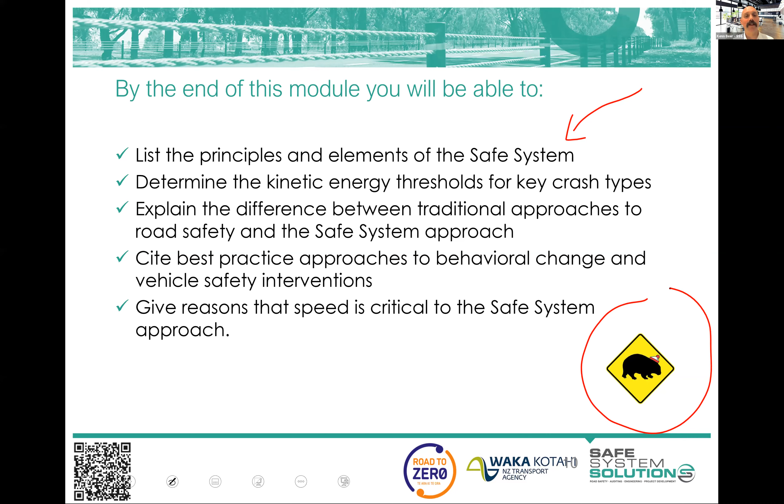Okay, Road to Zero is New Zealand's road safety strategy 2020 to 2030. Now, I know you all have a copy of this next to your bed and you read it every night. But for those who don't, it's worth picking up and having a flick through, because it's actually a really world-class document for a number of reasons. The approach being taken, the research, evidence, and modelling behind it, and a few of the interventions are quite world-leading. You've got some wonderful road safety experts in New Zealand who are helping shape these things. And then there's a real acknowledgement of the operational challenges that take place at every level - from the national level, the engineers out there on the arterial network trying to upgrade highways and the like, local government to the local roads and the challenges associated with that, the community challenges that are faced. So, really, really good document.

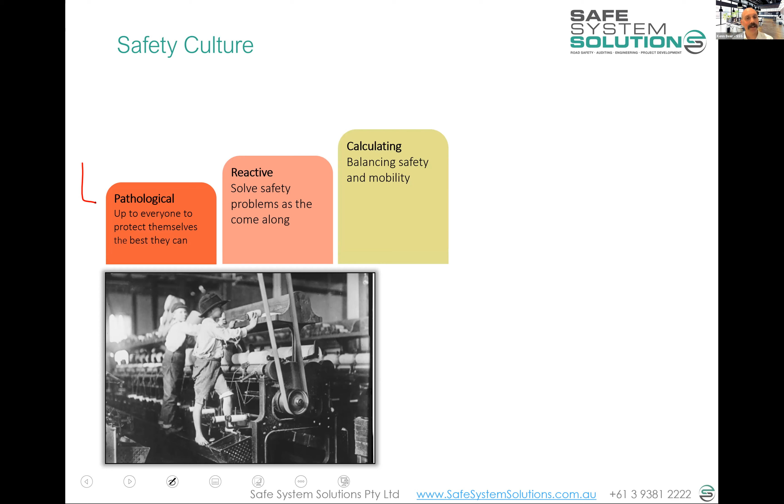Then you elevate up from that, and it goes into what we call the calculating safety culture. This is where the economists usually come into play. They come into the factory and analyze it, and okay, you've got an issue there, and you're paying out quite a bit of money for lost widget production and productivity, you've got to pay the families out for people that have been killed, and you get fined for these different things. So actually, if you were to invest £30,000 in this factory, you could save yourself £90,000 over the next 5 years. I've come up with this thing called a benefit cost ratio - notice I was doing it in pounds because this was back in the day when pounds were used - a benefit cost ratio of 3. So every pound you invest, you'll get £3 in return - it's good, it's good investment to invest in safety. And the factory owner says, yeah, okay, that sounds good, and then you go and fix it.

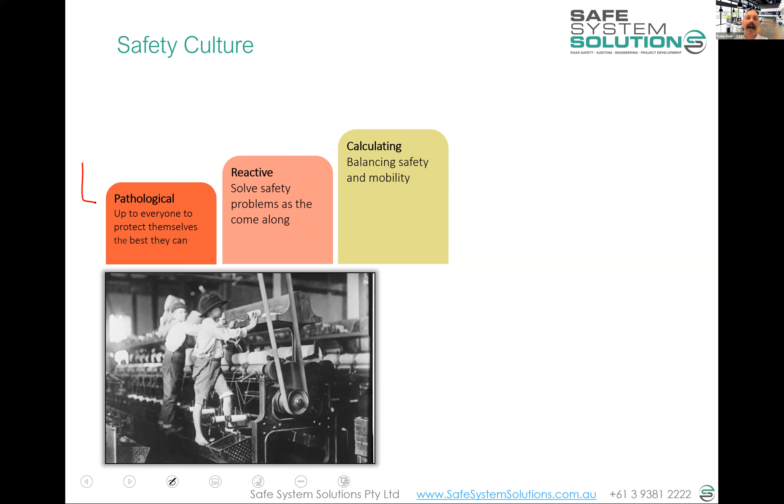Then you elevate it up one notch from that. This is where we're into what we call a proactive safety culture, which says safety must be at this very, very high level. We will produce as many widgets as we possibly can up to that safety level. And if we drop under that safety level, widget production will stop until we get back to that safety level.

This is where really factories have generally gone in the developed world. We are in a proactive safety culture, and nobody will bat an eyelid if a factory gets shut down for safety issues. Obviously the people running the factory will quickly rectify any risks that have been identified, but it'll stop. Nobody's saying, oh, this is an impingement on my freedom and blah blah blah, all that usual stuff we hear when we try to implement risk reduction measures on the road network.

Now, it's a different system. I mean, people will say this is a closed system and very regulated and the like, but there was a day when it was a very open system. The last thing you have in the safety culture ladder is the idea that we need to continually invest once we have a proactive safety culture to maintain that culture. It doesn't just happen and then you walk away and do nothing - there's a lot of effort in continuing to maintain that.

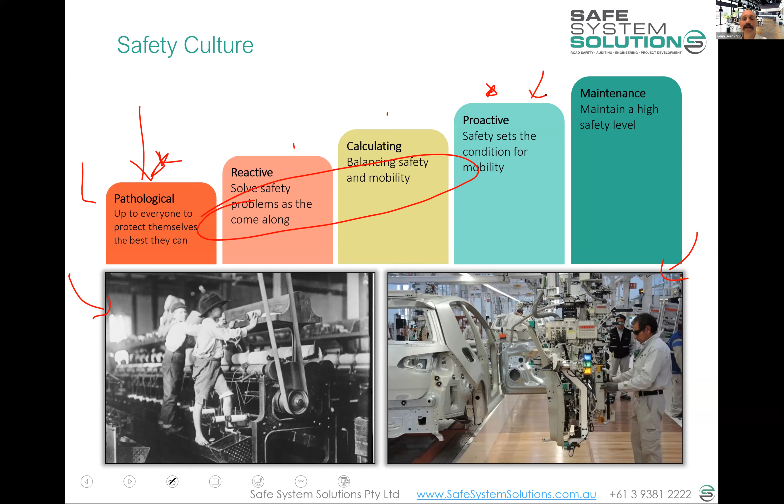So any comments or questions on that, Kathy?

No, Ken, all good. We've got some widget responses that have come in though. Anyway, there's one I'll read out: widget, wombats in danger, getting experience transformation. I love it - prize there, by the way. Yes, but there is a question from earlier.

You mentioned that everything was based on evidence - who is collecting, curating, evaluating, and distributing the evidence? Wow, amazing question. So there's quite a number of agencies around the world dedicated to researching and evaluating road safety. The national or state agencies in Australia do a fair bit of that. Austroads is a great platform for trying to disseminate some of the research and direct research. Austroads takes ownership of that - Austroads is really just a collection of state and New Zealand national road agencies, so that they can invest collectively in research and production of guides and the like, and try to disseminate that.

Waka Kotahi does a lot of that as well. We see pockets of local government coming up with things, because it doesn't need to be these big, million-dollar research projects. You can try something in your local area and get it evaluated in a quick, cost-effective manner.

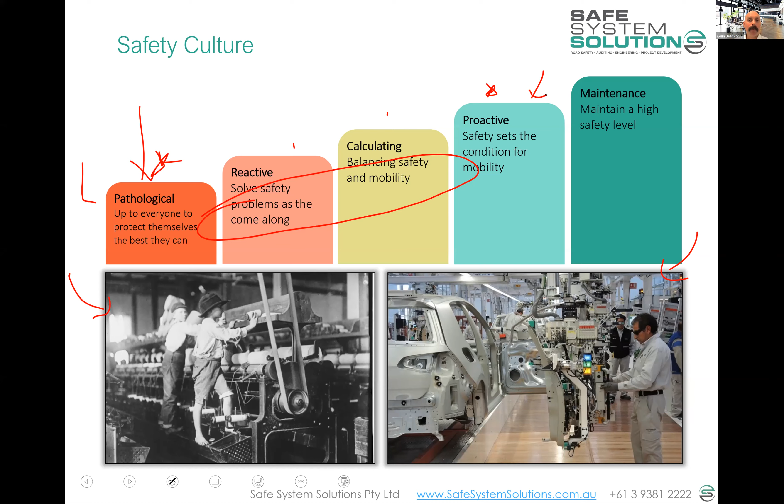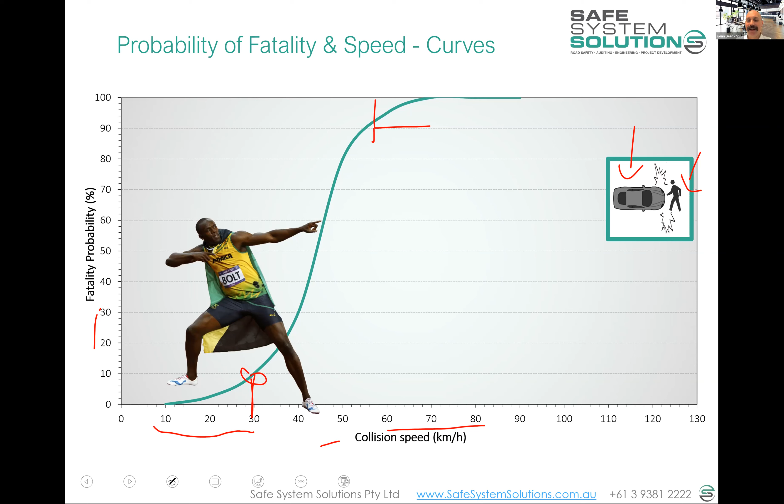Now, we can have a bit of a laugh at that one, but we know that those are within tolerable force thresholds of humans. In fact, he recovers, he broke a few ribs, but came back later the next year and won the gold medal in the Olympics. So that's what we can handle.

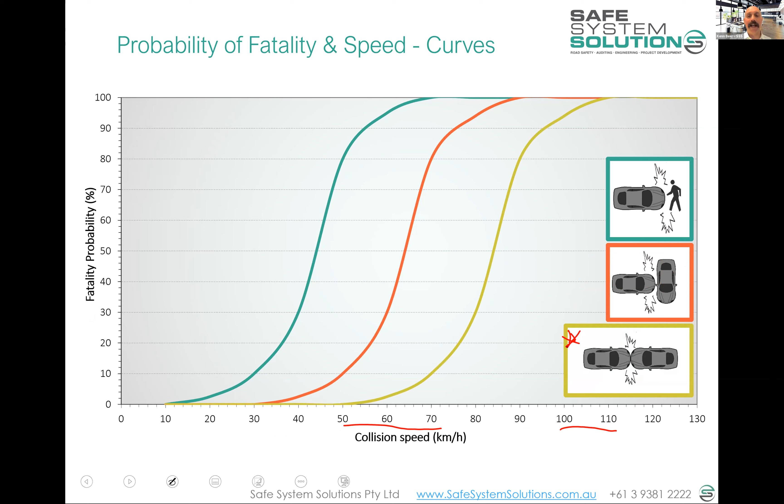At a closing speed of, say, 100 kilometers per hour each, the closing speed is 200 kilometers an hour. But the crash forces imparted onto the occupants of those vehicles is actually equivalent to a 100 kilometer per hour crash. Some of you will be going, not sure, my physics is questioning that.

There's a great Mythbusters episode on this. Kathy, if we can send a link to that Mythbusters episode, I'd really like to share that with people so we can move that whole conversation on. But basically, it's because if you have the same mass vehicles at the same speed crashing head on, the occupants of the vehicles go from 100 to 0, and it's the deceleration forces that do the damage. So it is equivalent to running into a wall at 100 kilometers per hour. Let's send around that episode.

Now, interestingly, in safe system terms, we draw this line: 30 for pedestrians, 50 for right angle crashes, 70 for head-on crashes. These become really important numbers for us as we assess anything out there for its alignment with safe system principles, because we're saying, okay, humans are going to make mistakes, these crashes are going to happen. Are they going to happen within these tolerable limits?

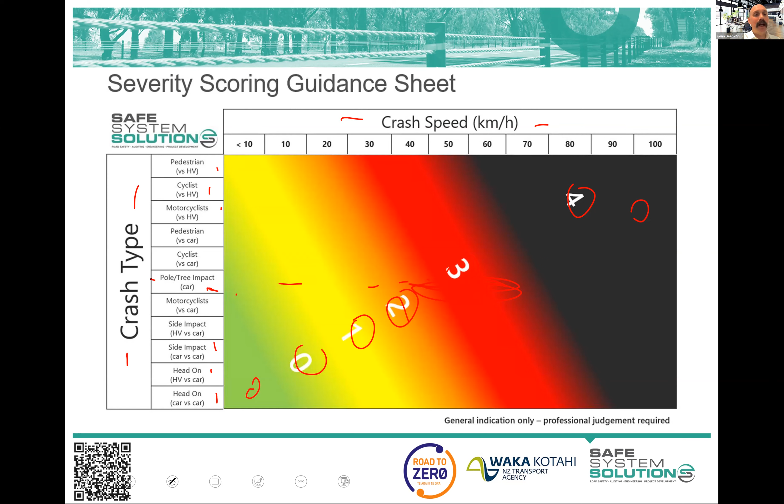So you'd probably be slightly moving it down a little bit on this. And so you would make some sort of judgment calls, and you'd be talking around maybe the 60, 70 kilometre per hour mark as sort of potentially survivable, maybe for somewhere in that area.

Power poles, if you wanted to design something to kill and seriously injure people on the road, power poles are pretty good design from that perspective. Obviously a pretty horrific design. I mean, the only thing would be to sharpen it, I suppose, just to really hammer it home.

But anyway, you're getting very graphic there, Ken. Thank you for that image this time of the morning.

There were some other questions based on what do the curves look like when hit with heavy vehicles, and are these based on fatalities across all age groups? Is this where the scoring sheet comes into it a bit more? Yeah, and it is across all age groups, those curves were. Now I really do need to flag that those curves are generally accepted nationally in New Zealand, at Austroads level, everybody uses them. There's a lot of research currently going on into recreating those, looking in more detail in the Australian and New Zealand environment with slightly newer fleets, but also reanalyzing those, and they're shifting a little bit. But for now, just take them because everybody uses them, and we'll keep an eye on the research.

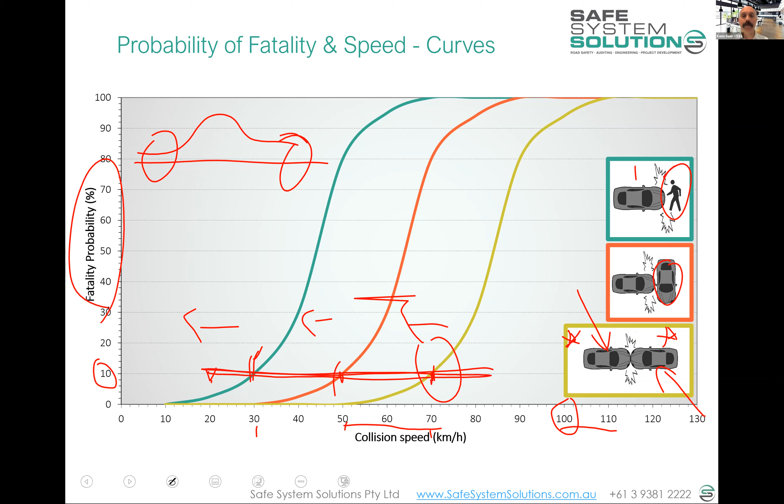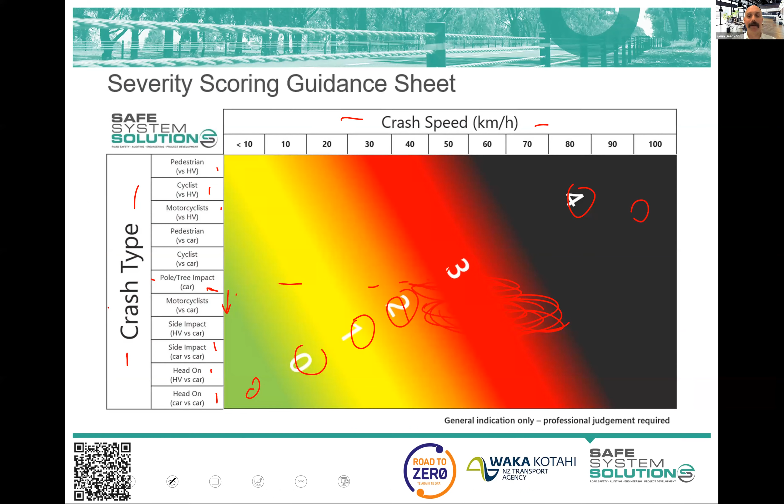And the thing is, though, that changing the human is the hardest thing to do in the system, because we're fighting against biology and DNA, and it's going to be extremely hard. I'm not saying it's impossible for us to get better human operation in the system. But where we go to is to say this is a system failure, and we need to alter the system when these mistakes happen to mean that it doesn't result in death and serious injury. And that could be the vehicle, it could be the road and roadside, it could be the road user. So let's look for system changes.

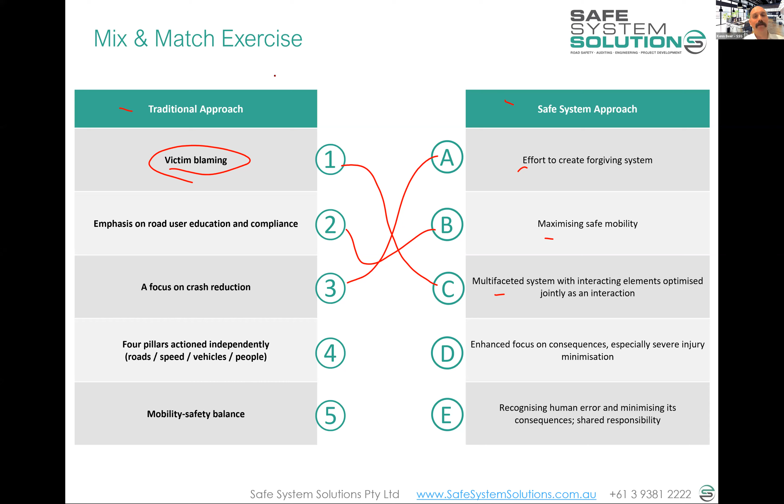Now let's pop the last guesses in. I should have said a few of these could probably go to a number of different cells. I took it from an Austroads thing from a while back, but it's a good little exercise to get that thinking happening. Hit submit for those who haven't—let's display that, Kathy. Almost everybody's done it.

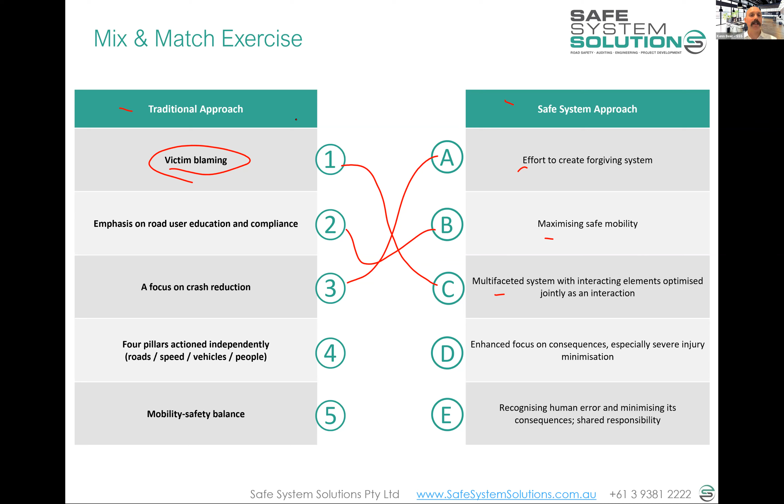Okay, let's have a quick look here. Good stuff. Actually, instead of just looking at where people went, I'm going to stop sharing that and do it on the screen here because it's a little easier to see than the multi-choice. But as I say, some could have gone to a few different ones.

Victim blaming—well, we're trying to recognize human error and minimize its consequence. We've got shared responsibility under the safe system. Emphasis on road user education and compliance connects to the effort to create a forgiving system—it's not to say we ignore education and compliance, it's just that effort to create that forgiving system. A focus on crash reduction connects to enhanced focus on consequence, especially severe injury minimization, with crash reduction meaning all crashes of all types.

Four pillars acting independently connects to a multifaceted system with interacting elements optimized jointly as an interaction—that's a bit of a mouthful. Mobility safety balance connects to maximizing safe mobility, which is a better way to say that. I hope that helped a little in your thinking—don't worry if you put some to slightly different ones, because the thinking itself is the key.

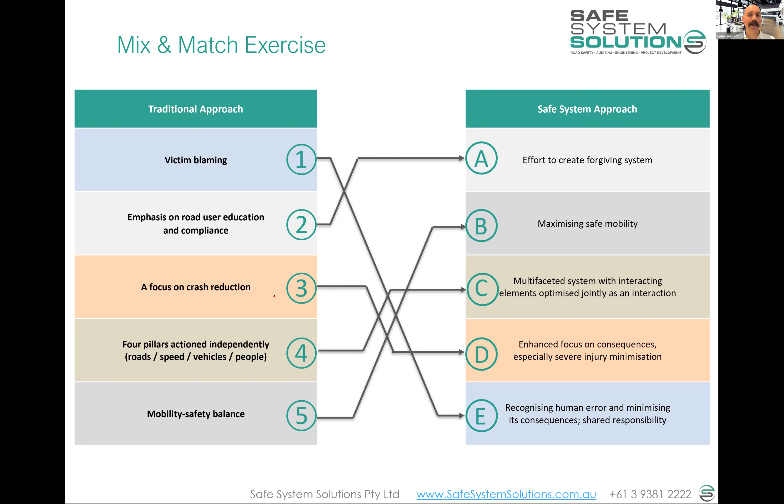A good quote here from Ian Cameron, a Western Australian: 'We need a paradigm shift in road safety policy to stop the road death epidemic, and we need it now. It is unrealistic to expect that education and enforcement alone will bring the needed step change. Even road users who know and follow the rules make mistakes. A safe system creates an environment in which simple mistakes will no longer kill or seriously injure people.'

All right, quick little exercise here. Here is a bit of road. It's got a central wire rope safety barrier system and a flush narrow median. It's got 2 lanes in one direction, 1 lane in the other, and it swaps.

So it's what we call a 2+1 road. You know next to nothing about this road. There's a bit more of it, you can see. But this project was amazingly hard to actually make happen for a big number of reasons. It was one of the first 2+1 central barrier jobs in Victoria, in my home state, and there was an unbelievable amount of pushback across a whole lot of areas.

Let's quickly, I'll give you a second to write in some of the things that stopped this project for a long time from actually being implemented. We said, this is what we want to do, this is sort of the design, and then what were the pushbacks? So just write them in the chat. Things you think put some serious brakes on this project.

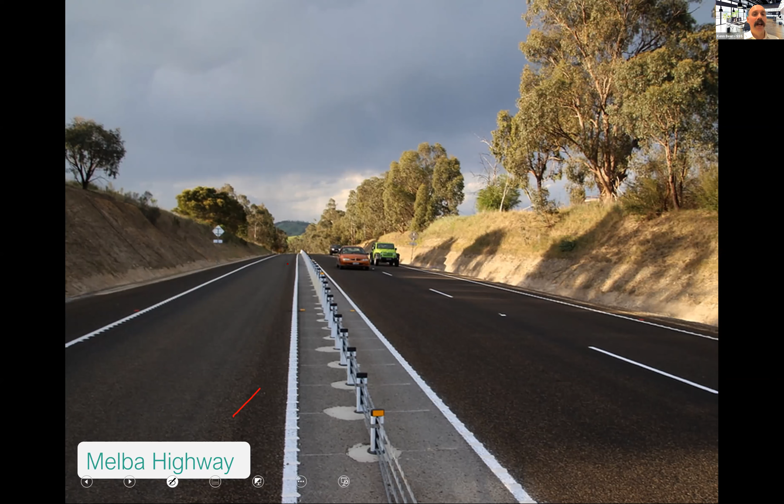That is not to say these were the biggest issues. There were a couple that, especially this deflection one, just blew my mind. What I was saying is that if a vehicle was to leave their lane and hit that barrier, you calculate the deflection, and it's going to go slightly into the oncoming lane.

This basically stopped the project for about a year, because they said, well, you're going to deflect into the oncoming lane. And we're going, well, hang on a second. It's currently got a painted white line as the only thing separating the lanes, and you're worried about it deflecting a little bit into the oncoming lane? It doesn't meet the standards.

Bloody hell, okay, let's stand back and have a look at this from a logical, real world perspective. We're going to save huge amounts of lives. So, yeah, the point of this is that we're going to come up with all sorts of challenges and hurdles. And to be able to stand back and look at what is going to get us the best reduction in trauma for our community is what we need to do. And it may not be the same way that we've been operating.

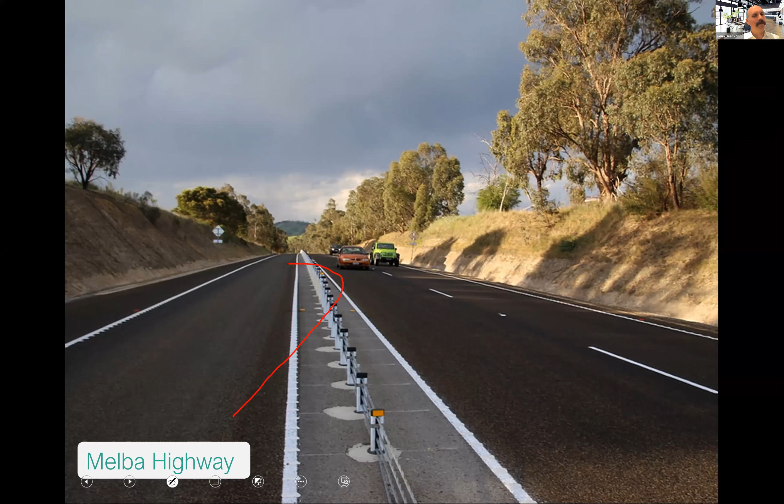We're going to need to innovate. We're going to need to change what we've been doing. We're going to need to implement things that cater for people doing things wrong, like people falling asleep and leaving their lane, or people texting and leaving their lane. We're going to try and stop this resulting in death or serious injury. We're going to try and minimize that, of course, but it's still going to happen.

This one, of course, once it finally got in, somebody hit it. Lots of people are hitting it. Some of them would have probably hit oncoming vehicles. In fact, one of them in particular very much was going to hit an oncoming vehicle.

The people involved called up the road authority office and said, hey, I just want to talk to the person who put that barrier system in. You know, if you get that call, as many of you have, you think, oh God, here they're going to shout at me about something. Well, this one just wanted to thank the team, and it wasn't me who got that call, but they managed to say, hey, do you want to talk to our comms team? And then they videoed it.

We put that little two-minute video into your pack. Some of you would have seen it before, but I really encourage you to watch that. It's a great little video, and it's this road. It's this, not this exact incident, that was another just probably nuisance hit, but it's a really good demonstration of safe system in action.

Safe system in action because somebody made a mistake. Somebody fell asleep, they left their lane, they hit the barrier instead of the vehicle that they would have hit. And to me, that's the system just stepping in. It's still a crash, but it doesn't result in death or serious injury.

If the barrier wasn't there, we'd probably be saying, why would you drive when you were that tired? Yeah, and say, you can't do that. Let's do another education campaign on not fatigue driving. But this is a system response.

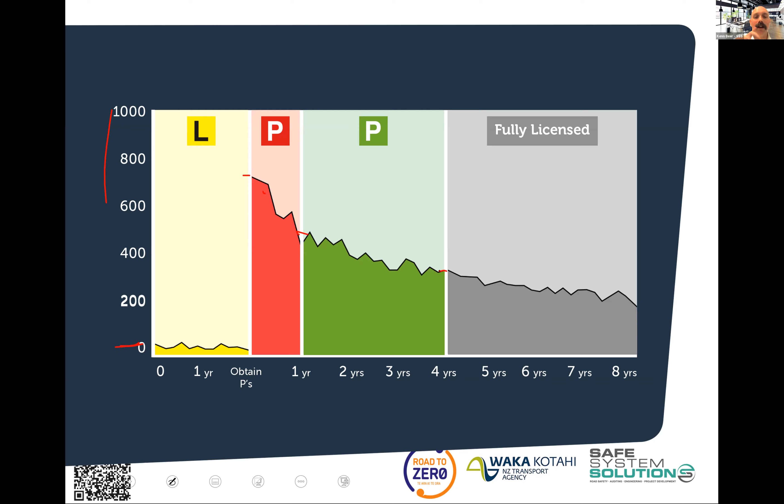Some really good encouraging things, incentivizing campaigns and programs - there's a bit of evidence to show they work. So if you are willing to pay people to drive safely, you can get some road safety societal benefit from that. That's doing things like, if they have no demerit points or speeding fines in their probationary period, they get a full free license. That's been trialled around the world and shown to be quite successful.

Advertising of specific behaviours is the key. An ad that just says drive safely really doesn't do anything. But if you can be very specific and say take a break every 2 hours, now we're onto something.

It's very hard to measure the success of campaigns and the like to try to do behavioural change. But what they look for is recall - can people remember messages - and then they can try and relate that. Interestingly, comedy is quite effective in recall, especially with young males, and there's some really great ads available that try to integrate some of that comedy into it. We've put 3 or 4 of those into your memory stick for some ideas.

Some of them are New Zealand. In fact, New Zealand does it best - some of the best road safety ads have started in New Zealand. And we're trying to change that culture, talking about a system.

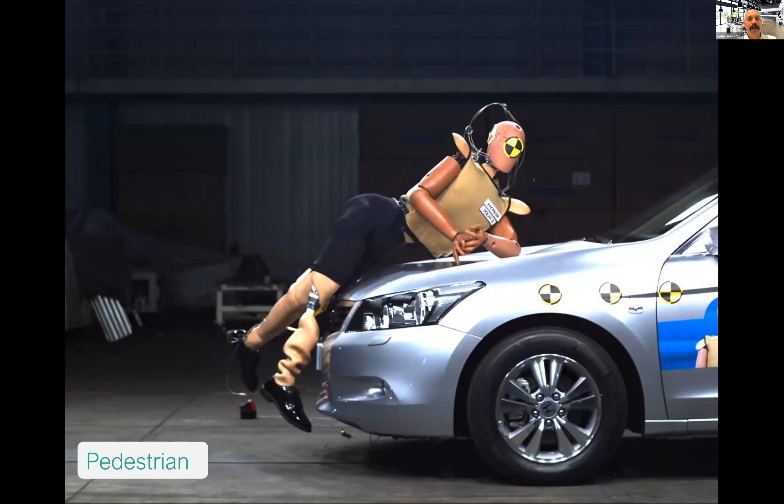Pedestrian protection, we talked about this. Now it's part of ANCAP, hitting the bonnet. Your bonnet will pop up a lot of the time. Wonderful features - you won't know that, but if you've got a relatively new car and you hit a pedestrian, your bonnet's going to pop up and act like a little cushion, or it might even have an airbag that pops out. Like my car certainly has an airbag when I hit pedestrians, which of course I'm not, I hope I'm not going to do.

Actually, my vehicle should stop before the pedestrian, or at least slow down a lot, because it's got sensors in it. Which sort of brings you to the point of at what point are we going to see enough of the vehicle fleet looking like this, with no steering because it's driving itself?

Well, depends who you ask, but really the answer is a long, long time away. Yes, we'll start to get little bits and pieces of autonomy coming in more and more. And for those who are in this game, they know there's 5 levels of autonomy. This is either a level 4 or a level 5 autonomous vehicle. A level 4 would be if this was restricted to certain roads. A level 5 would be that this can go anywhere, the same as you can when you drive. We are so far from being able to get to a level 5.

We have little level 4s in trial modes, but we've got to roll over a whole fleet, even if we had the technology, which we're many years away from. So what we know is that we can't just sit back as people managing the road network and the infrastructure and say, oh well, the vehicles are going to do the job, why bother? We need to alter the environment, and we need to keep pushing at this.

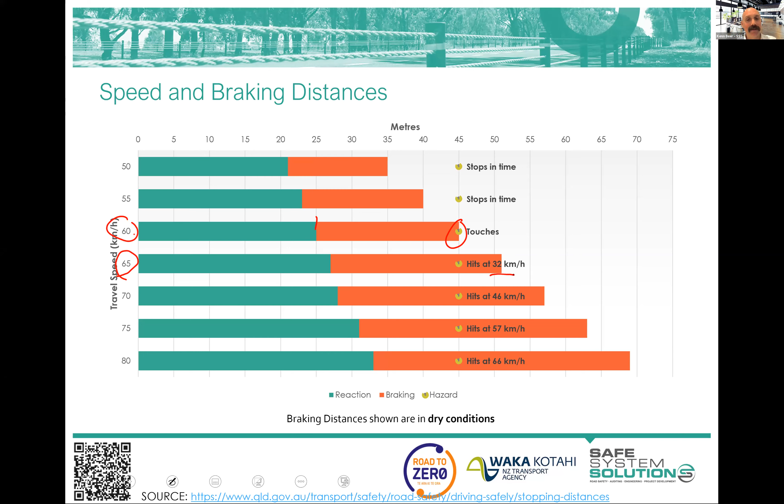There's a few other things that embed in that. We saw that injury is actually exponential after certain points, so small increases in speed increase injury force - that's the physics and biomechanical tolerance issues. It's actually a 4th power relationship for fatal crashes and a 3rd power relationship for serious injuries. So small changes magnify as really big changes for the more severe crashes. If you can get a small reduction in speed, it will come through as a really big reduction in death and serious injury.

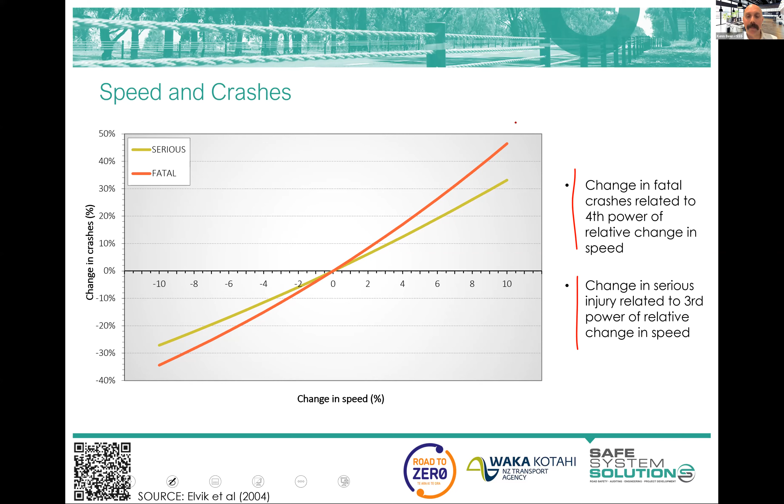Speed is such a controversial topic though, and New Zealand's in the thick of it, sometimes leading the world, sometimes lagging behind. But all the jurisdictions out there are facing challenges. Speed limits are one part of the thing, and the public's very divided on this. There's research done on public opinion on whether lower speed limits will reduce crashes on the road, and about half the public say, yeah, don't believe that.

Females are much smarter than males there, more believe that - and the reason I say smarter is because there's so much evidence around the world to show that that absolutely is the case. But we need to try to convince the public on that. The public's a bit more into the idea that severity will be reduced - a bit of understanding of basic physics.

Just a bit of stuff in your notes. We talked about speed - this is an interesting diagram, and I've been rewriting the Austroads Guide to Speed Management, which will come out, for speed limits and speed management. I popped this diagram in, which is out of Sweden. It basically shows that you can get a safe system with whatever you've got in terms of vehicles, roads, roadsides, road users, as long as you filter it through an appropriate speed.

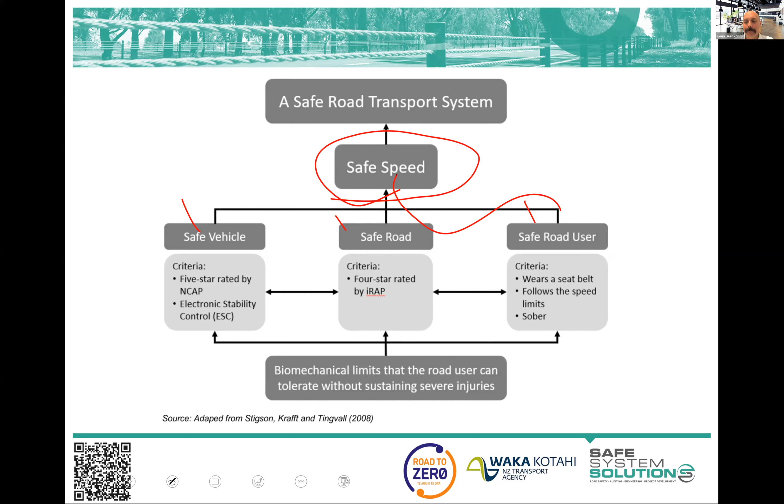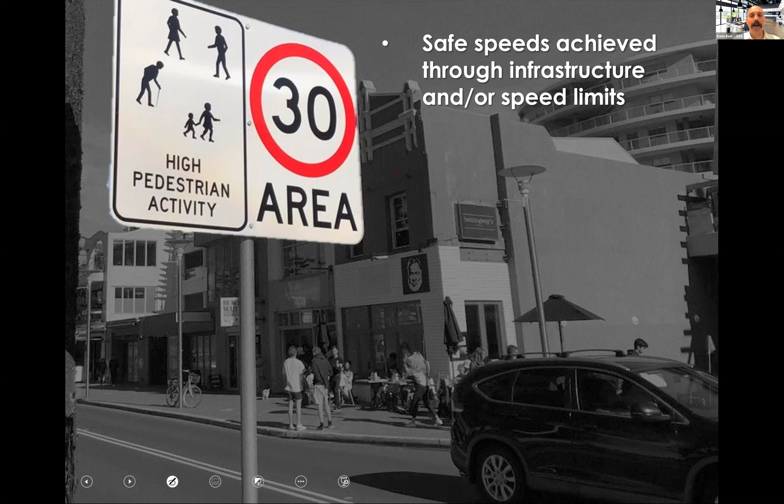We want to achieve these safe speeds through infrastructure and/or speed limits, right? Infrastructure is usually the most effective way of reducing speed, and speed limits certainly important and can do some wonderful things. But if you can alter the infrastructure to make people drive or ride slower, you're in a better situation. Explaining why a speed limit is in place helps with acceptance and compliance, and protecting vulnerable road users is generally well accepted, generally.

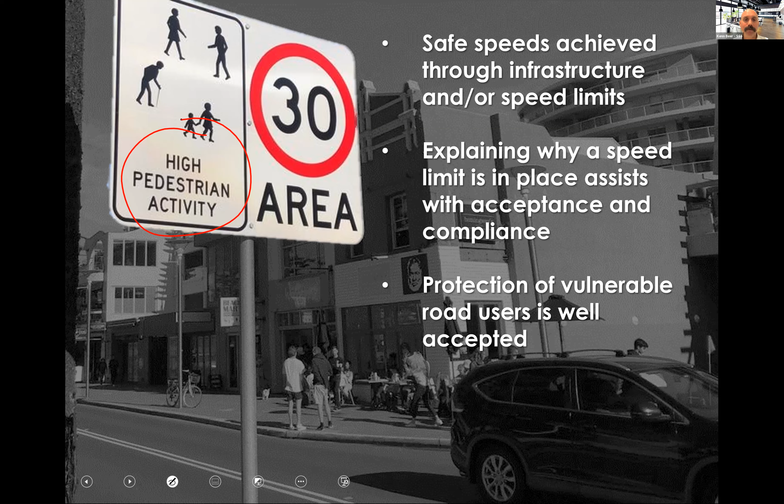Variable speed limits, I think, are a wonderful gateway - no, not like gateway in an infrastructure sense, but a way for us to step into lowering speed limits by targeting specific times of day. So you can alter speeds during different risk times. It can help you step into that space with your community.

In my last 5 minutes here, I just want to talk briefly about risk, and then there might be some questions that have come up. Risk, traditionally, we've said, is likelihood times consequence - that's your international definition of risk. And it's not just road safety risk, it's everything: financial risk, environmental risk, health risk. It's what is the chance said event will happen, and then how bad is it going to be when it does happen?

What's the chance of a recession? What is the likelihood we're going to go into a recession, and then how bad is that recession going to be when we do go into it? What's the chance of the crash, and then how bad is the crash going to be when it does happen? Under the safe system assessment framework, we actually extract the likelihood and split it into exposure to crashes, the chance of the crash, and then the consequence. Exposure is just the number of people exposed to that risk - the number of pedestrians, cyclists, motorcyclists, car drivers or car passengers. So when we look at those three elements, we've got exposure.

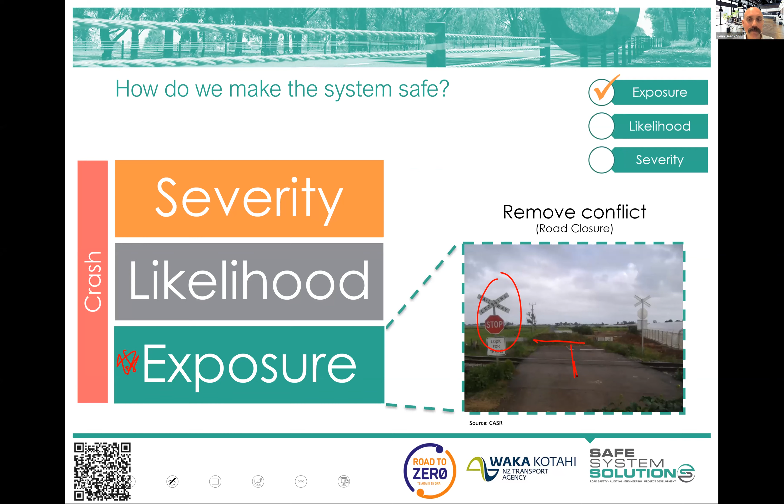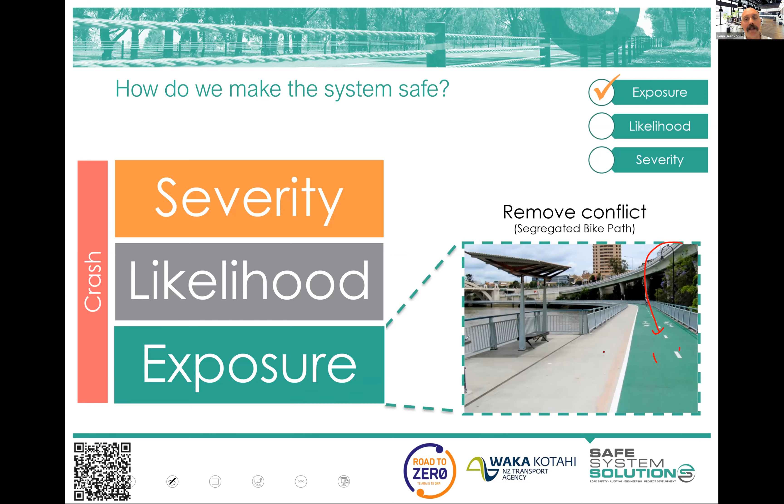Likewise, if you can take a vulnerable road user like cyclists, for example, and take them off the ability to crash with vehicles and put them on their own dedicated area, they are not exposed to the vehicle crash there. Sure, they might be exposed to bike crashes or bike to pedestrian crashes, but not that bike to vehicle crash.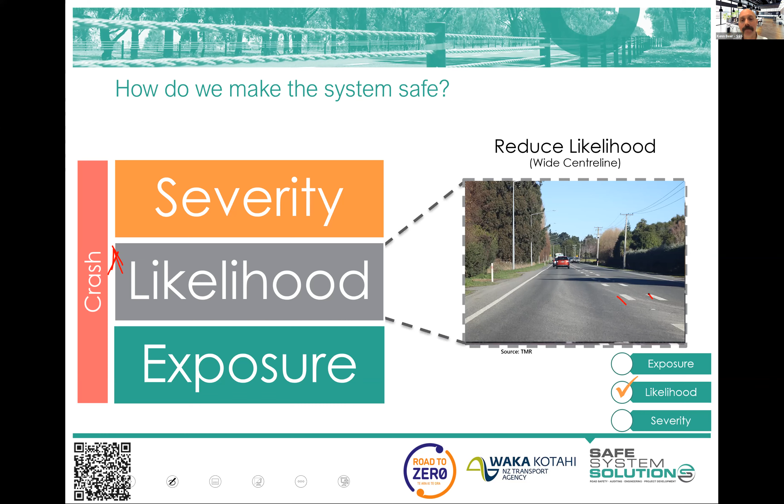Likelihood, a whole lot of things that we can think about in likelihood within the infrastructure we've got. All of those traditional things we've done, line marking, signage, delineation, sealed shoulders, wide center lines, all these things are reducing the chance that somebody will crash. Good surface conditions.

Traffic signals, they reduce the chance that somebody crashes. None of these things are impacting how bad the crashes are going to be when they do occur. They're just trying to stop them happening in the first place. And it's a great thing to do.

But what we need to do under the SAFE system is say, we're going to do the best job we can stopping these crashes happening. But some of them are still going to happen. And we need to start really talking about this one: how bad are they going to be? Ways that we can reduce the severity of those crashes is to do things to reduce speeds at conflict points, like raised platforms, slowing people down at the conflict area.

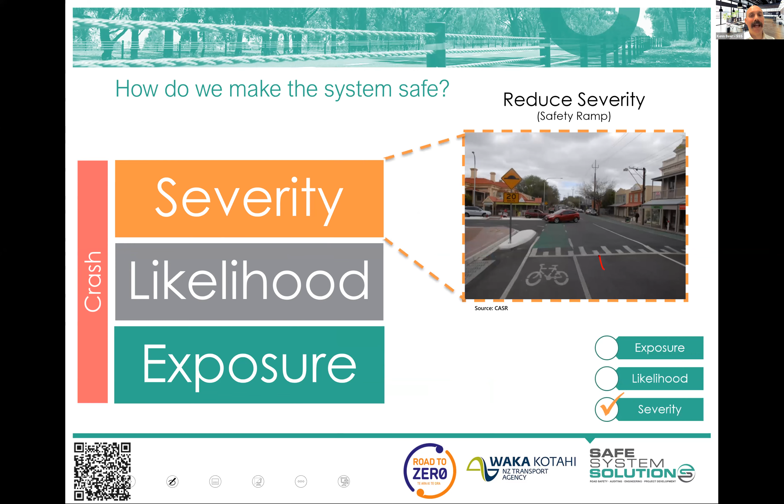Or barrier systems, a classic severity reducing technique. The crash still happens because they leave the road, they hit the barrier, they slide along the barrier, they wash off their energy over time. We've had a crash. These two have come into play. But this one now, the severity is being reduced.

I don't think we'll do that quiz directly because I want to see if there's any questions, and we've only got 2 minutes or so to go.